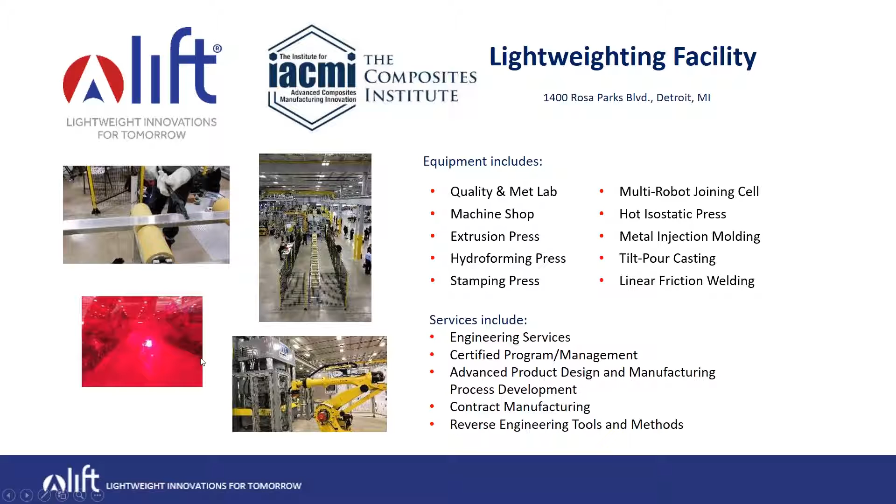We have a wide network of industry and academic partners, so we can team up with all of them to serve your lightweighting innovation needs. You can reach out to us at lift.technology, or communications@lift.technology is the email address as well.

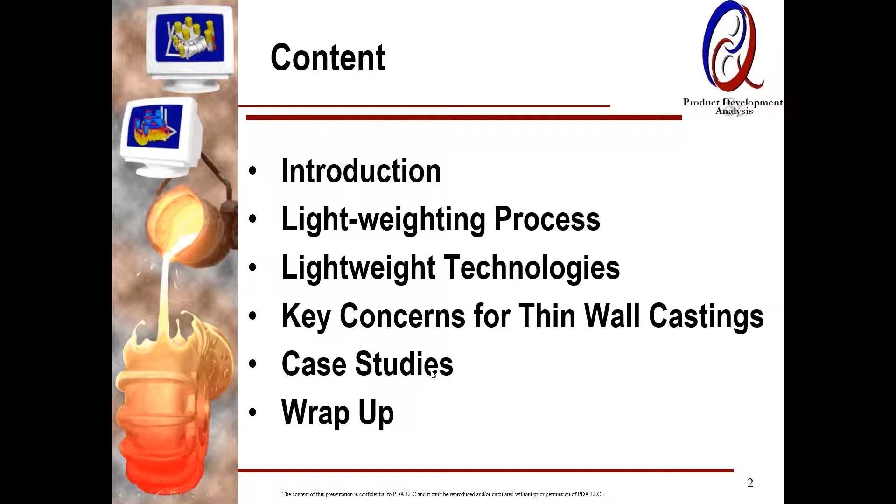So we are going to share some of the work we have been doing in partnership with LIFT, along with a few of our projects internally, and talk about the process. My content: a quick introduction, the lightweighting process, the technologies, a few concerns for making successfully thin wall castings that we learned and researched through the LIFT project that we'll be sharing. I'll wrap up with some case studies.

This is our 25th year. We started the company offering engineering services to metal caster OEMs, foundries, and tool makers. We have served over 150 OEMs, casters, and tool makers. We are a member of 3 institutes, including LIFT.

We worked on 3 projects on thin wall castings. We're also a gold member of America Makes, focused on 3D printing or additive manufacturing, and a member with projects working on the Digital Manufacturing and Design Innovation Institute out of Chicago. We also support the military DoD folks as a subject matter expert on casting and composite. You can see the membership.

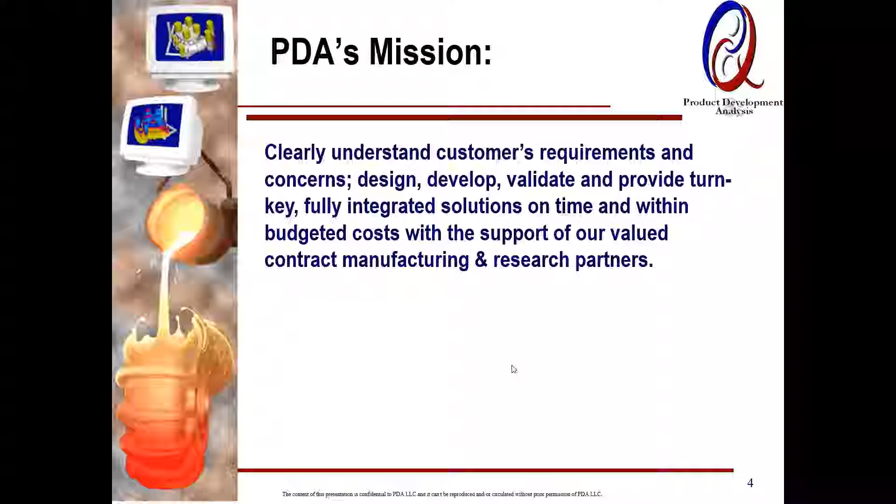Our mission is to understand customers' requirements and concerns, and come up with a solution which fits their needs on cost and time. Most of our projects are heavily solution and virtual simulation driven, including new technologies. 25 years ago we used to call it rapid prototyping; to me it's another version, additive manufacturing and such.

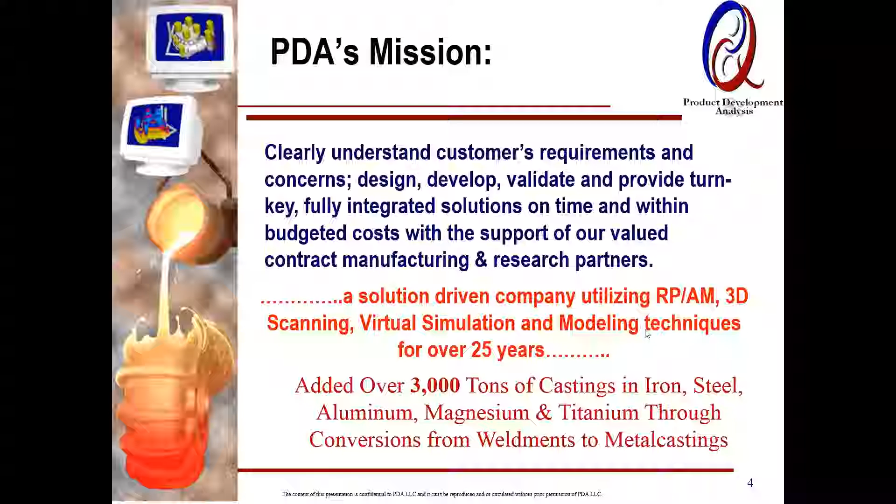We have really gone after our competition, which is forging, fabrications, and to some extent plastics. With our help, we have added over 3,000 tons of castings in various alloys by conversion. So quite a bit of experience on that.

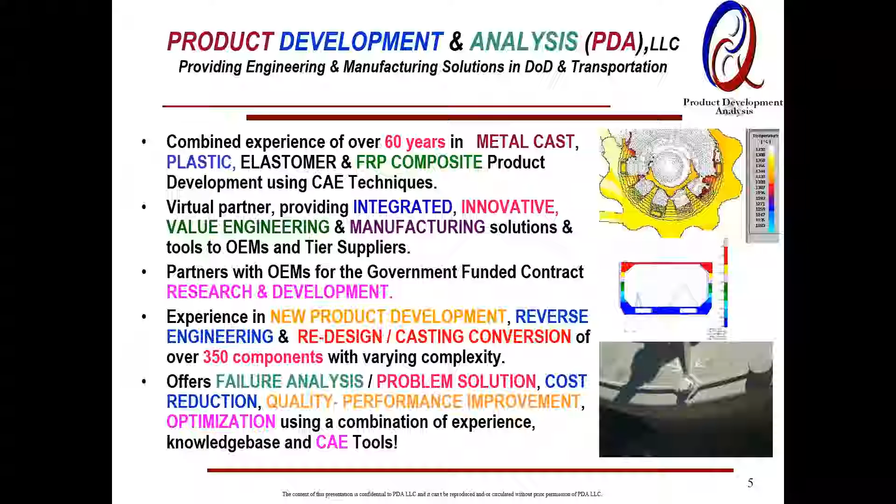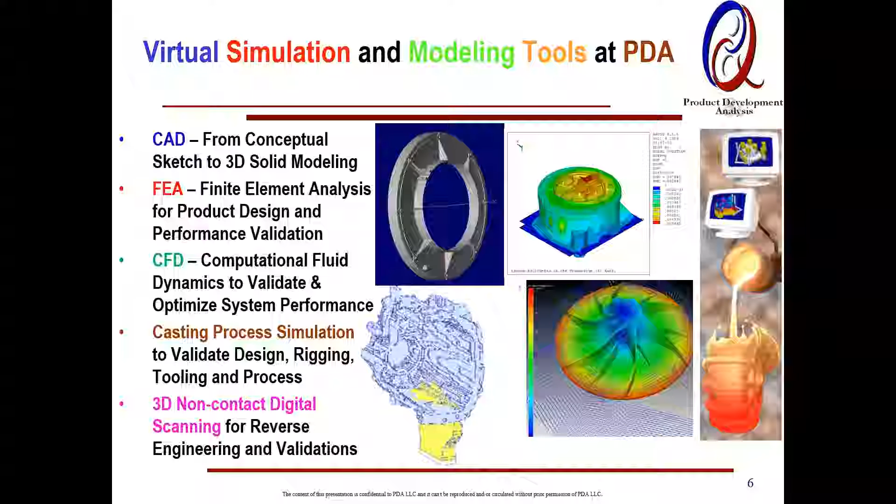In addition to the commercial work, we also get into R&D, and this is one example working with LIFT that I'll be sharing. These are some of the tools: standard CAE, CAD, FEA, CFD, process simulation, quite heavy on that for various processes. We have a very vast database, and 3D scanning.

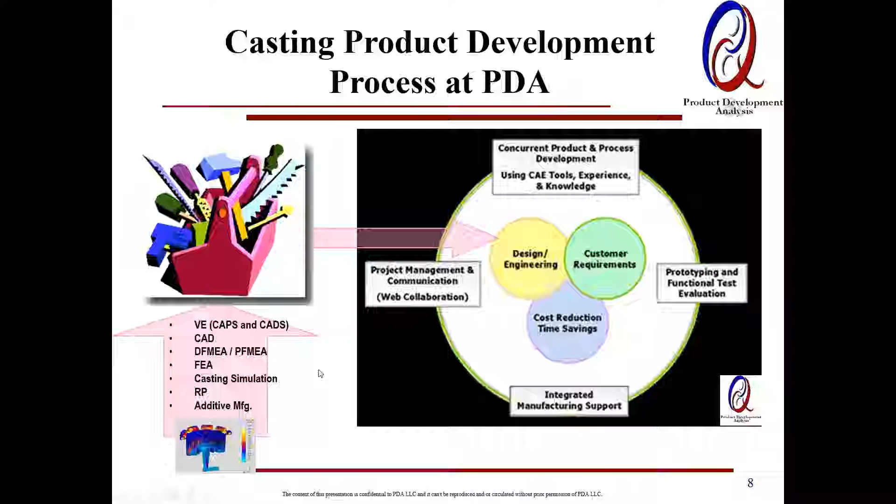These are some of the tools we use. We have internally developed a casting alloy process selector, capturing the best practices we use for selecting a process and an alloy. CADS is another tool, where we worked with the American Foundry Society to generate a placeholder for a material database suited to various casting processes and alloys. We also use additive manufacturing quite effectively as a tool to lightweighting, coming up with lightweighting solutions that I'll be talking about.

So the key element for a successful lightweighting project: design optimization, value engineering, and I'd say this is very critical - evaluate the process capabilities with regards to dimensional and surface finish aspects, especially when going up to thin wall casting manufacturing in production successfully.

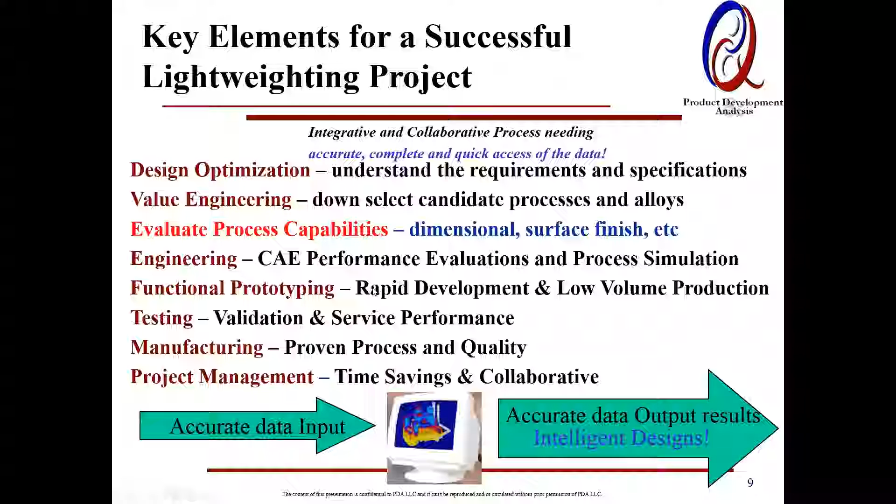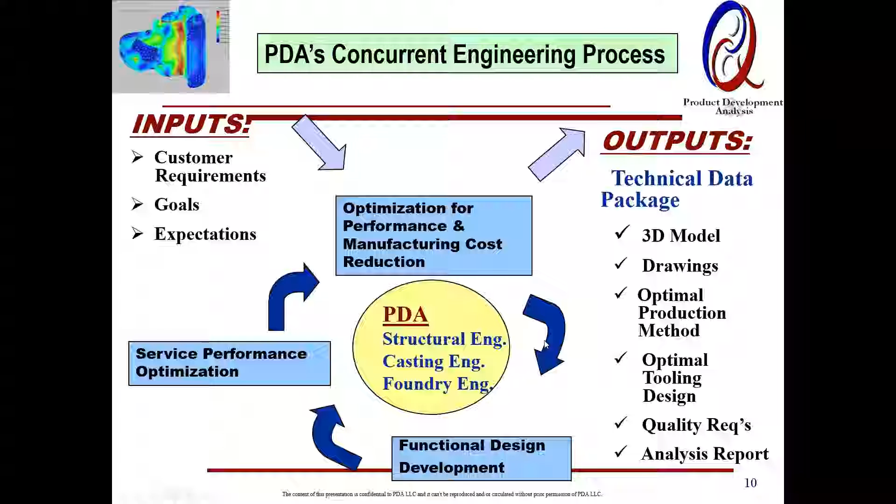Then we get into detail engineering, all the performance validations. We do invariably go with functional prototyping, validate and refine our model design, and then get into production. So it's all driven digitally from concept to finished products, and we heavily focus on optimization for product performance, and also manufacturing cost reduction.

So inputs, requirements, outputs could be the data package or a physical component, and we effectively use failure mode effect analysis at the design as well as at the process levels.

So what are the opportunities we have for lightweighting? Obviously, if you have the time and resources, the best benefit you get is right when you are developing a new product, as opposed to developing traditionally and then converting, especially with technologies such as additive manufacturing. It offers tremendous design freedom, and you can do a lot of part consolidation, and obviously the knowledge and experience is key, even though there are quite a few new tools out in the marketplace for generating designs. Those are quite effective, but you have to top it off with the knowledge and experience about the process and the alloy.

So the new product is quite intuitive, but also redesign and reverse engineering, especially for legacy parts, for optimization - that's a greater opportunity in my mind, where you have a legacy part and you can redesign to get the weight out and improve the performance and come up with a solution which overall leads to the lightweighting of a device or equipment or a platform.

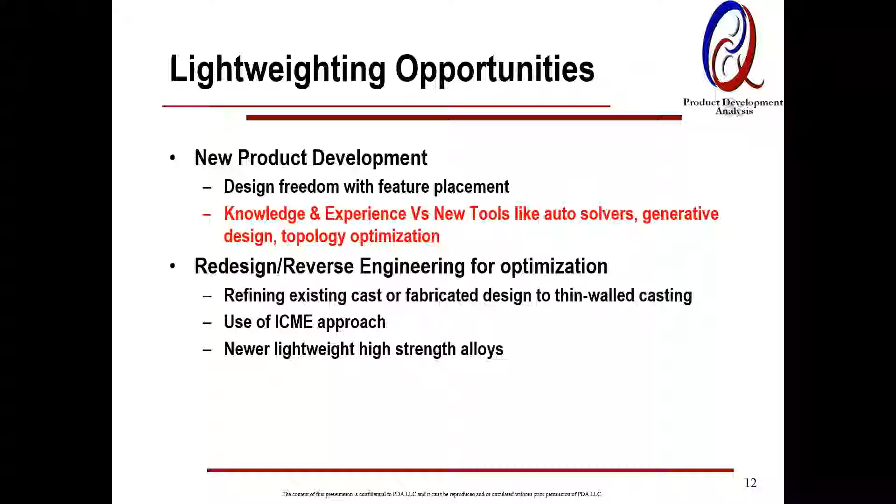And we extensively use the ICME approach, and there are quite a few new alloys being developed. I'll share the one we ended up working on as part of the LIFT project, and that's another way you can optimize by redesigning the current product.

So ICME is basically integrated computational materials engineering. It's basically a way to capture the material information along with the process and simulate the process conditions, for example cooling rate and chemistry, and come up with predictive microstructure and properties, and ultimately plug those in to validate your final product performance from the structural point of view.

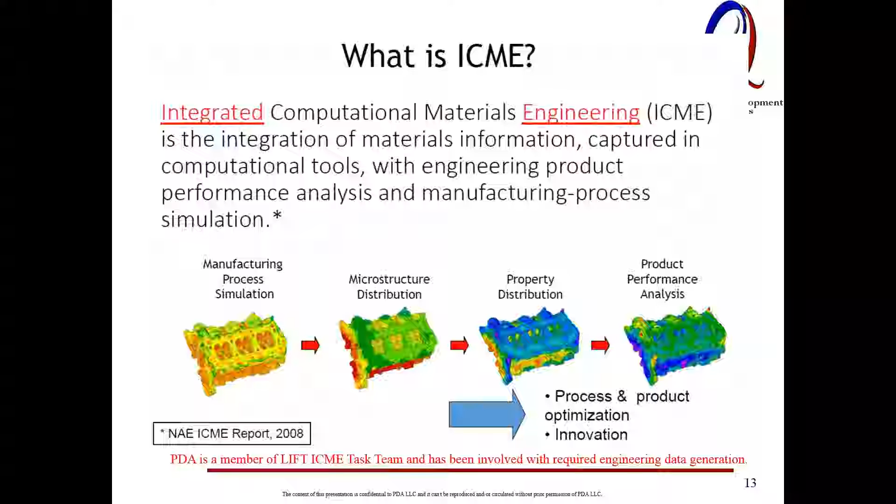And LIFT has a very powerful ICME task, which we belong to and contribute towards that mission. This is a very effective tool that you almost have to use in order to get any form of lightweighting or design optimization, by using the local properties that you would expect, as opposed to using handbook data.

So jumping a little bit here, for us on the metal casting side, lightweighting comes by reorganizing the features and, more importantly, thinning the walls. And how do we do that successfully in production? These are some of the key factors that influence successfully implementing or making thin wall castings.

The fluidity of the alloy drives how thin you can make it, which is driven by the thermophysical properties, namely viscosity and surface tension, and the process conditions - the pour temperature, which typically, with most alloys, the higher the temperature above the liquidus, the better fluidity you tend to get. But there are penalties with that, which I'll also deep dive into.

And then solidification and microstructure evolution - with a thinner wall you have higher cooling rate. For directionally solidified alloys, you have shorter feeding distances, so that poses a challenge with regards to feeding the casting to the soundness you're looking for.

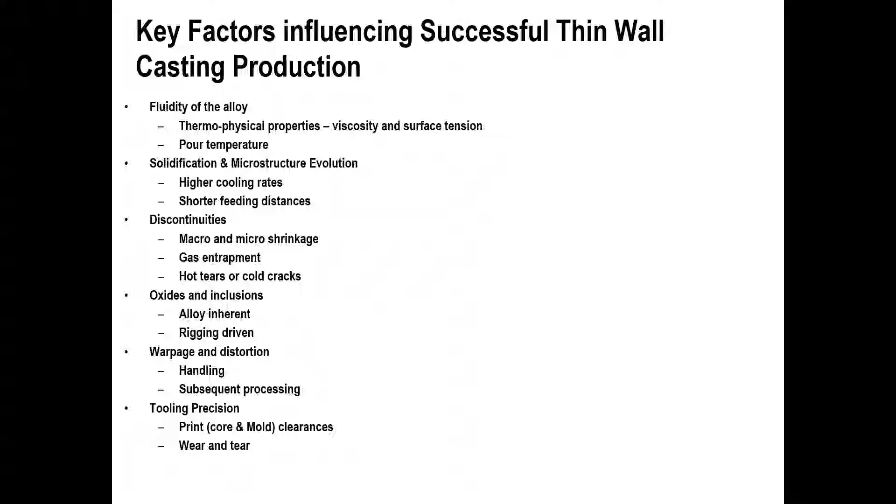Especially your print clearances between the core print and the pattern and the core. And then normal wear and tear adds to changing those clearances and then ultimately affects your final wall thicknesses.

So how do we mitigate or come up with solutions for these obstacles and successfully make thin wall castings? Obviously new alloys which have better fluidity, rigorous simulation using ICME tools, and novel risering, gating, filtration, and venting schemes that you would need with thin wall.

I would say automation in handling. This is our experience on one of the LIFT melt projects where we did make thin wall castings, but we only got 30-40% yield at the end of the line. A lot got broken in the tumbling and shakeout operation. So it is a challenge, and you just have to think through and come up with a way of handling thin wall components.

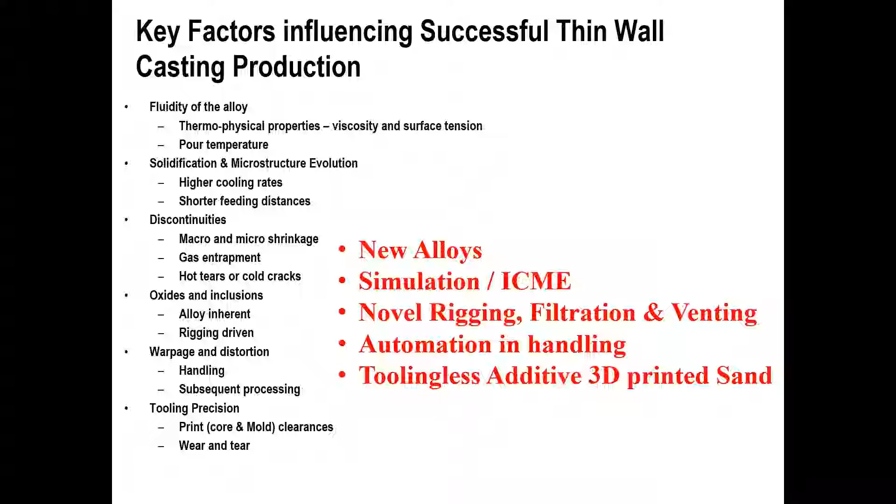And then to completely mitigate and eliminate the issues related to the tooling is the use of toolingless additive 3D printed sand, which really opens up the whole freedom to the design engineers and production engineers to really go after thin wall repeatedly.

In terms of the technologies I will cover: new alloys or modified alloys with relevant properties in order to achieve the target goal of lightweighting. I'll also expand on additive 3D printed sand, comparing it with traditional sand casting, or a combination of hybrid traditional sand mold with 3D additive core package. Plenty of opportunities there.

In some alloys, thinner walls have better mechanical properties than thicker ones, relatively. This is counterintuitive to design engineers. The mechanical engineers tend to get a little nervous and say, hey, I want to add thickness based on what FEA told us, just to be sure. But in some cases, by adding thickness, you are deteriorating the properties.

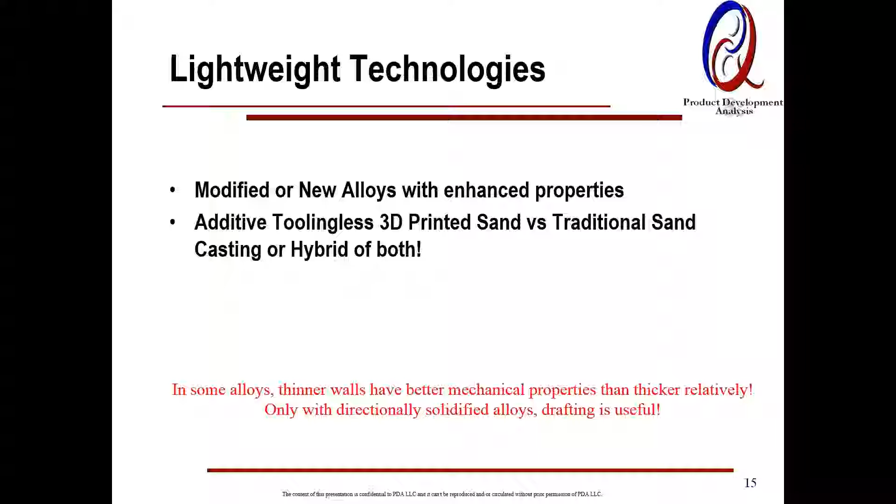Only the directionally solidified alloys, for example steel, where drafting is useful to get a nice feeding channel established. But otherwise, for most of the iron and short freezing range alloys, the tapering really is not required unless you are going with conventional tooling that needs the taper to draw the tooling out of the sand.

This is our LIFT melt R2-5, that we developed to make thin wall ductile iron castings — a high fluidity alloy that helped us successfully fill thin wall castings. Here is an example of experimental work: a simple spiral fluidity spiral, which is quite popular.

Years of work has been done in this area just to measure fluidity and compare between alloy A and alloy B type. What we did is keep all the process parameters constant, in both the simulation and the experimental conditions, such as pour temperature, time, the type of mold material, and the applied vent.

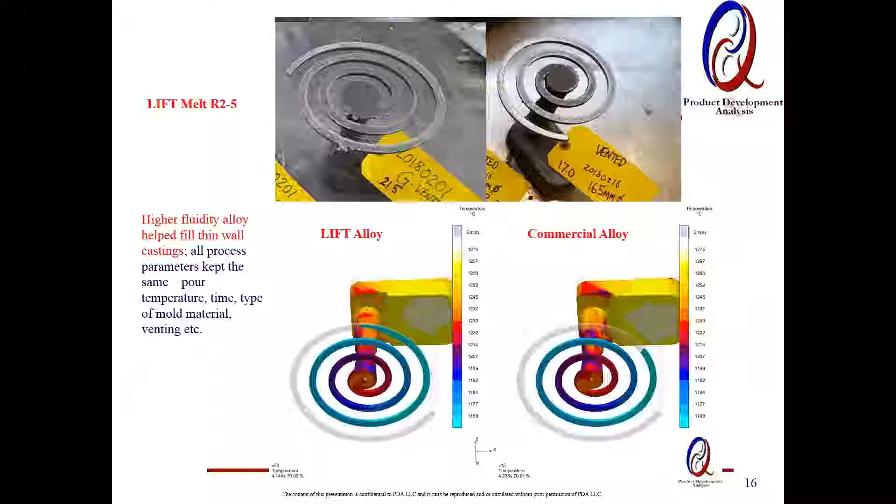For this particular alloy, we got a feel for higher fluidity distance. One way we measure this is the overall length, or the maximum dimensions. Here we got about 21.5 inches versus 17 inches for the commercial alloy. We were able to simulate and get a feel for this before we actually made the prototype and plate castings.

So that was on the spiral. Then we made finger castings — a typical 65-45-12 commercial alloy — under these process conditions. You can see the filling pattern is quite uniform. We had thicknesses from 2 millimeter, 2.5, 3, 3.5, 4, and 6 millimeter, all poured under the same tree.

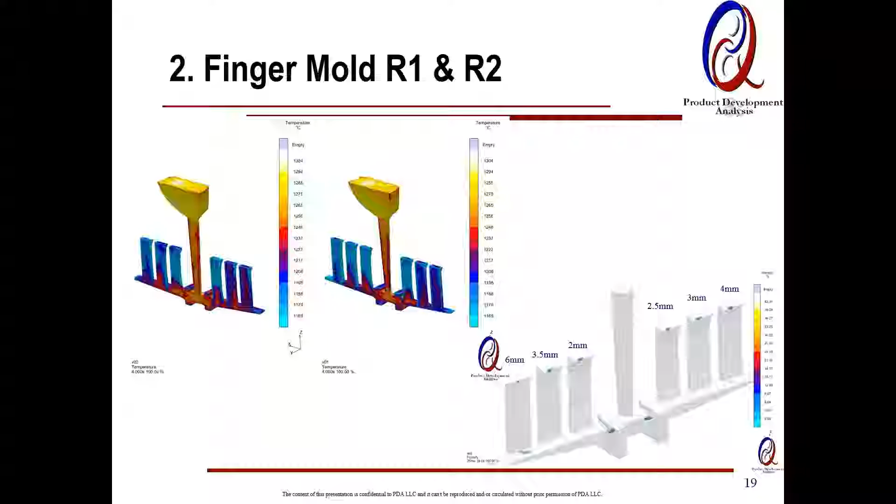This is quite common — in any industrial casting you may have a combination of all these thicknesses — and we wanted to make sure that in the high stress area, it predicts the properties and soundness that the mechanical engineer wanted from FEA and fatigue calculation.

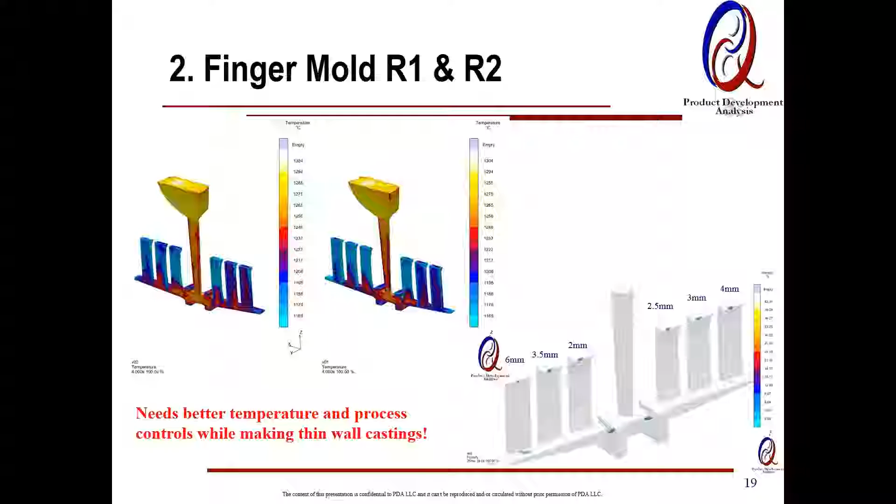One thing we learned from a lot of this experimental work, with support from Michigan Tech University who were part of the team, is that in order to make thin wall castings, you really need better temperature and process control, because it's quite sensitive.

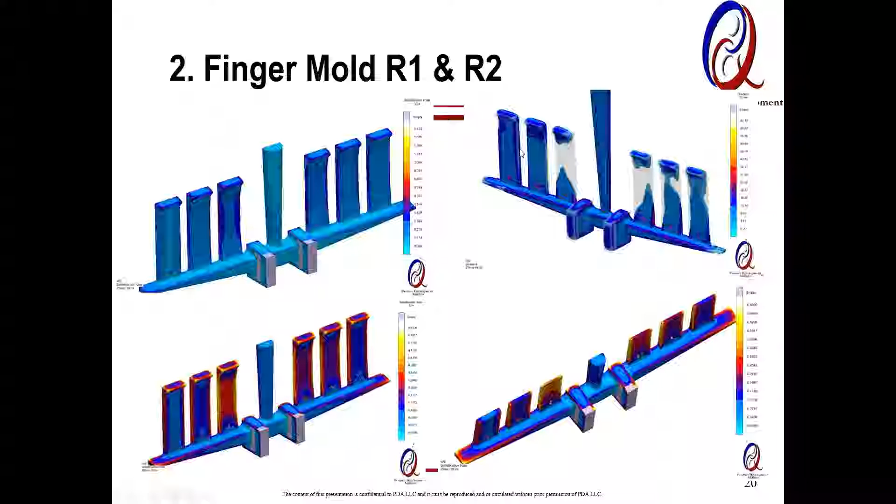A temperature variation of plus or minus 20 degrees, which is what you see in the commercial environment, may give you a totally different result, and you may not succeed. So you need to tighten up your process controls.

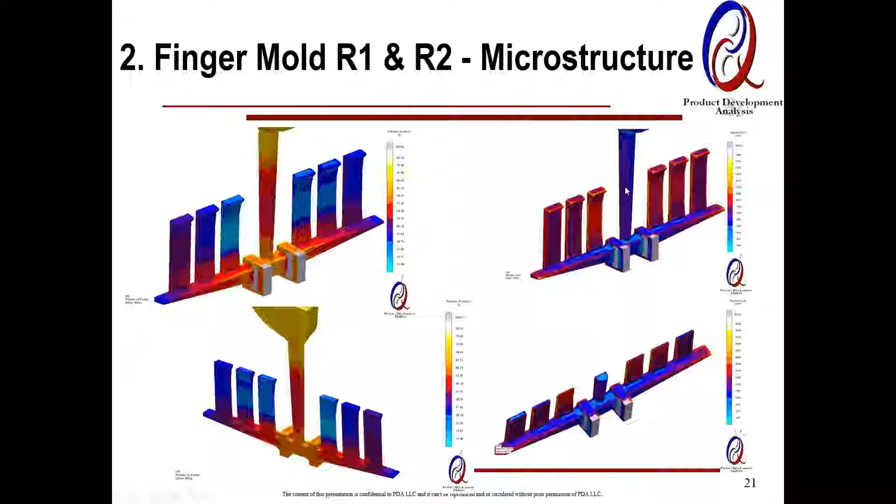With different section thicknesses, we obviously saw different solidification rates, different cooling rates, different gradients, as you would expect — this being the thinnest and this the thickest. When we went further into predicting the microstructure, we looked at the fraction of ferrite, which is strictly driven, for the same chemistry, by cooling rate.

Higher the cooling rate, the less ferrite and more pearlite you will have, and that impacts your properties, most importantly the elongation. As you can see, it's the same casting, same chemistry, but different wall thicknesses.

In the thinnest wall, we found around 2% elongation where we really wanted 12%. That led us to modify the alloy to get 12% elongation in the 2 millimeter wall thickness.

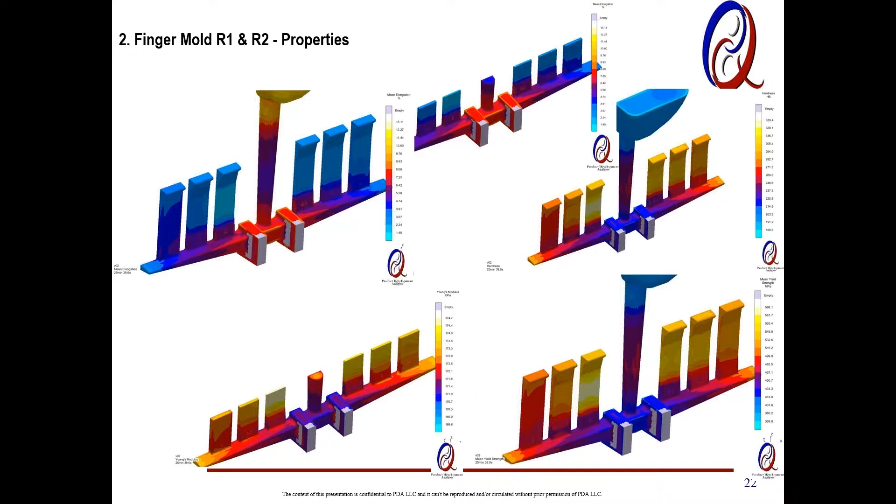This kind of work helped us set the stage and direction for the research needed to achieve that goal. This again lays out the importance of the ICME tool as part of new product development for thin wall castings.

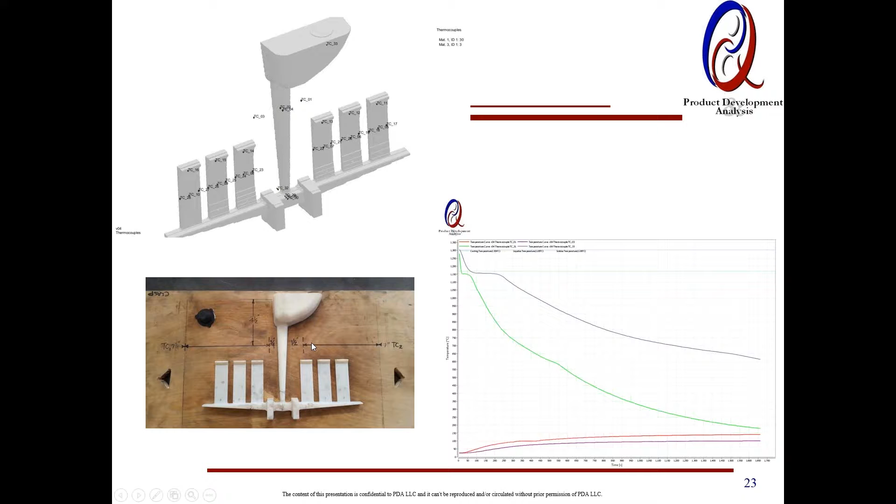Modeling and simulation is based on data, and you need to calibrate it. When we poured these castings at a small foundry with part of our team, we instrumented thermocouples at known locations and captured temperature and time, which we recorded and got a good match. We thought we were pouring at 1300.

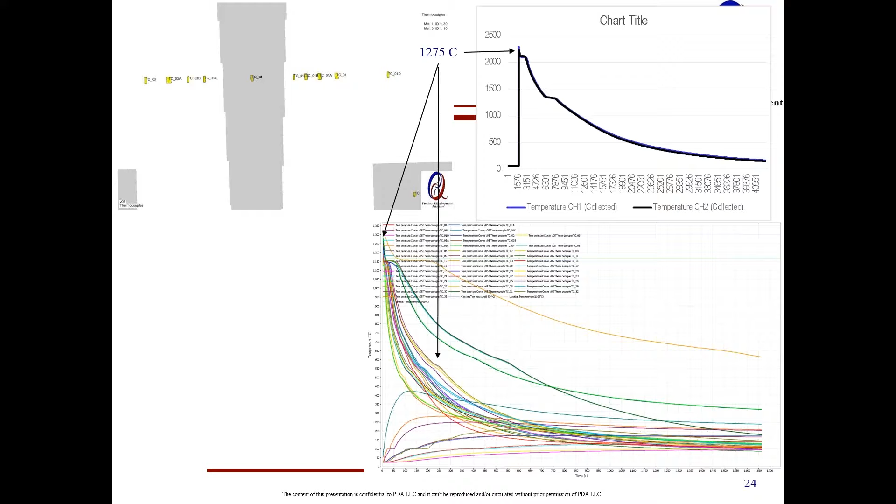By the time we got the metal into the sprue, we were around 1275, which matched fairly well with our simulated conditions. We put thermocouples in the metal as well as in the mold. So that basically wraps up making thin wall castings - the things to really look after, and how you may have to work on expanding your alloy scheme, make some modifications to get what you want. In our case, fluidity and better properties.

Additive manufacturing, I'm sure most of you are quite familiar with. Our version of additive is strictly printing a mold without tooling, or printing a wax pattern without a wax die for making investment casting, or printing a mold out of silica sand or zircon or chromite, and you just pour the metal - which is quite different from additive manufacturing as understood. Metal additive is where you build layer by layer using metal powder to build the actual physical part.

What we are doing here is actually making a cavity and pouring the same commercial alloy with the same ASTM spec, with the same known behavior, and the only magic is you don't use tooling. So that opens up a whole opportunity for design engineers - removing the draft or having a backdraft, putting the fillets and radii where you want, which you could not do because you were constrained by the parting and tooling restrictions. You can consolidate some of the welded, bolted features as part of your casting and come up with a one-piece casting design. And it's our experience that we get much tighter dimensional tolerances.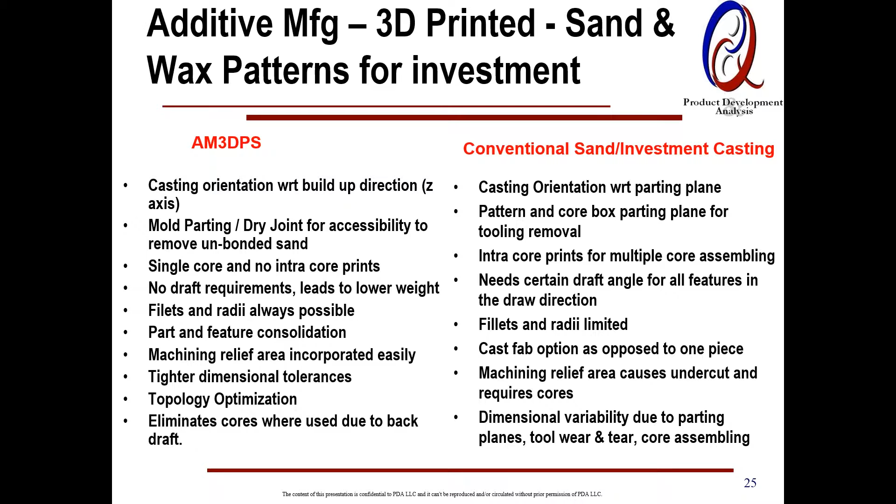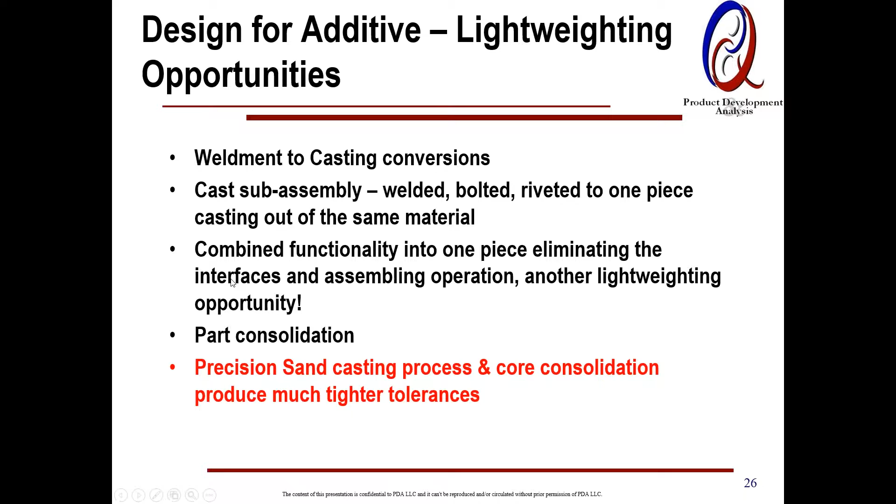So that is an area where there's an opportunity for lightweighting without even doing anything, just by switching the process from conventional sand casting to 3D printed. You can easily gain weight reductions, and then of course topology optimization - you can punch holes wherever you need in the low stress areas. You don't have to worry about adding a core or anything, it's self-cored. This gives tremendous freedom and helps us go after more fabrication-to-casting conversions, making cast sub-assemblies by eliminating welded, bolted, riveted joints, and even combining functionality into one piece by looking at a sub-assembly and combining multiple operations into one piece of casting that fulfills multiple functions.

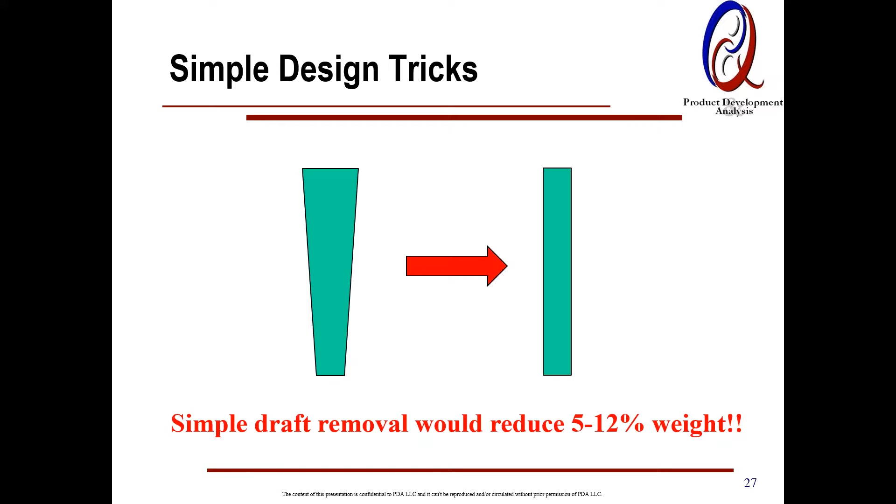We try to label this 3D printing process precision sand casting, so there is a distinction compared to conventional sand casting. It is a sand casting, but it has much higher precision and tighter dimensional tolerances. So that's another way we can do some lightening. The simple trick is, if you just remove the draft, in our experience - we've done quite a few projects - you can see anywhere from 5 to 12% weight reduction. This is low-hanging fruit; we don't really have to do much engineering around it.

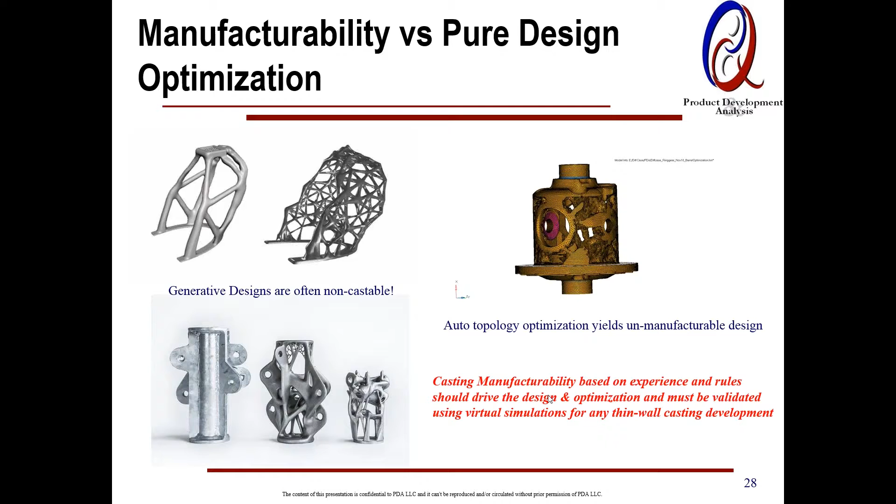So topology optimization - it's the computer which does all the magic. It does help to see where you can take the weight out, but you need a traditional approach based on manufacturability, like how the metal is going to flow into these thin areas and what kind of gating system would even guarantee that you'll be able to fill this part consistently. So I would say use that as a tool to get some direction, but ultimately go with the traditional approach of design optimization, validated with virtual simulation, for any thin wall casting development.

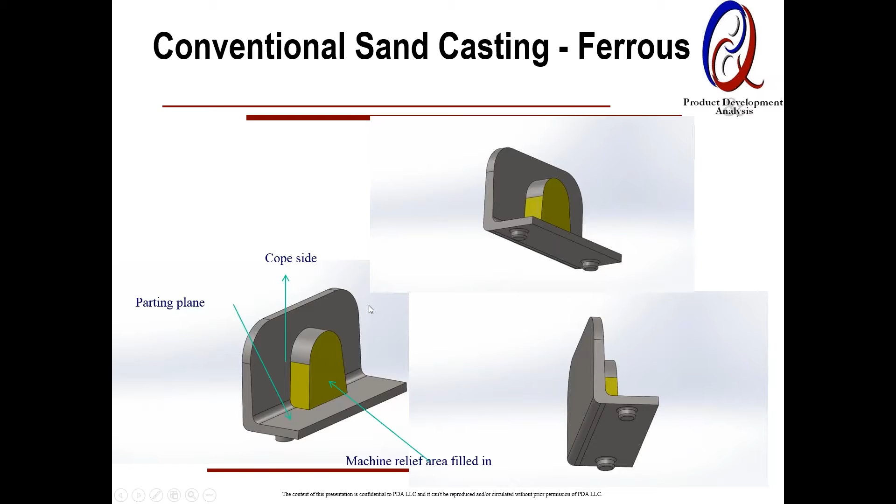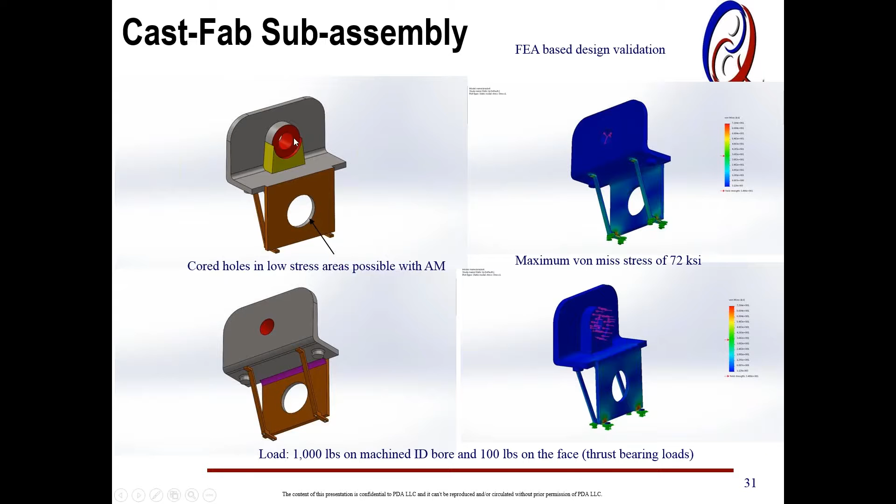So I have a couple of examples. This is actually a portion of a much larger casting that we helped an agricultural OEM with. This is the conventional sand casting. One of the issues they were having is, when they were milling this pocket, they really wanted a machine relief area, and in order to do that with conventional casting you would require a core the way it's parted - and we saw that as an opportunity. So here is the casting, here is the welded plate with the braces, and here is the FEA-based predictive stresses.

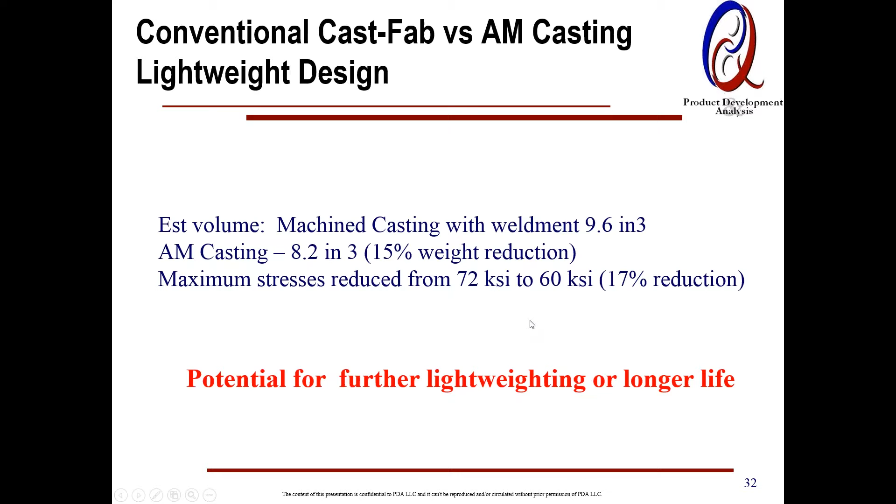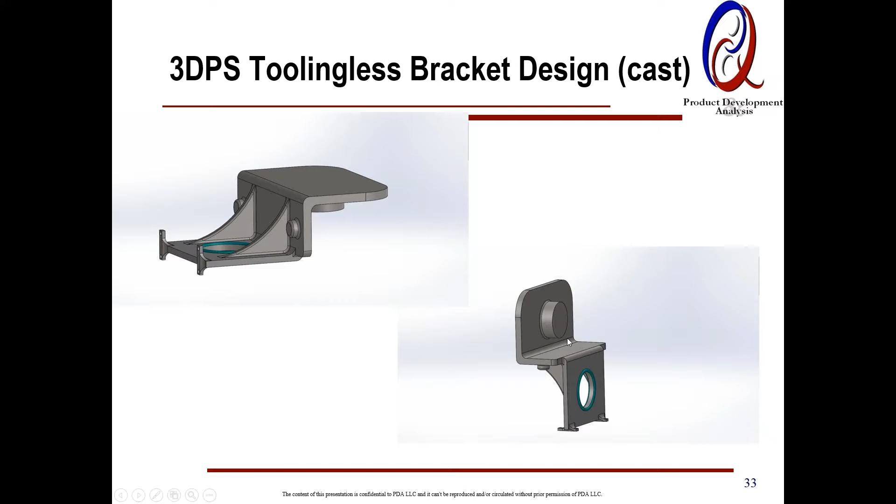Here is the loading - there's a bearing which goes in, and this is how it is made currently. What we did is we went with the additive route using 3D printed sand and gained about 15% weight reduction, and reduced the maximum stresses from 72 KSI to 60 KSI. So there's potential for further lightweighting, or since this is highly fatigued, with lower stresses you'll see a longer life of these components - it's a high cycle fatigue. So this is the bracket design we came up with.

Combined, stiffeners on both sides. They wanted a relief area, and we were able to do that. Also, this is from my experience making locomotive truck frames, where if you just have a regular hole, a cored hole, you lose the material and the stiffness. You can regain some of that by putting a bead on both sides of the cored hole.

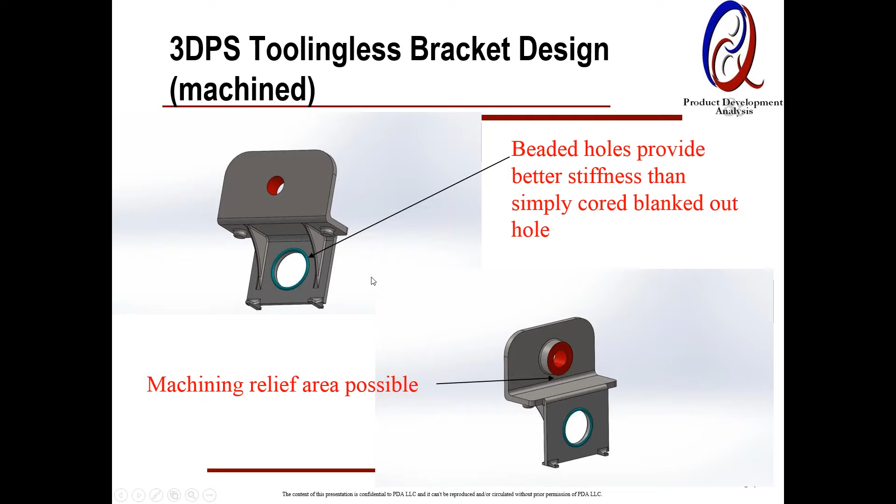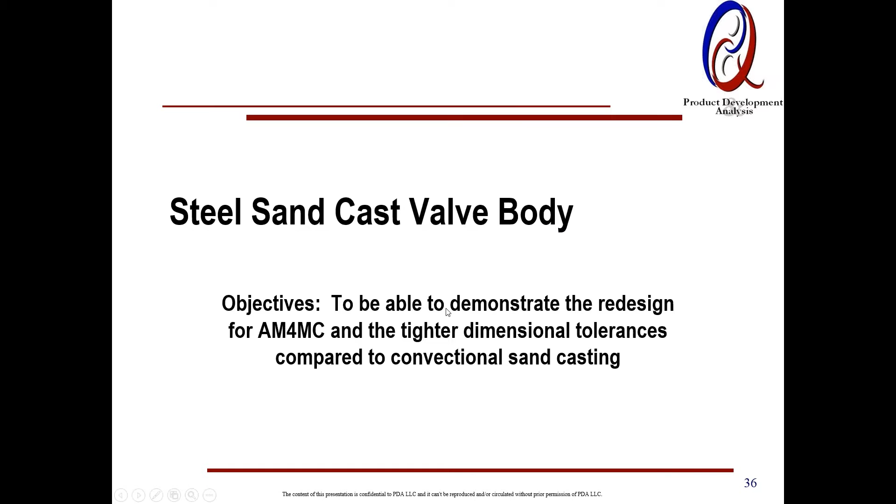Traditional castings, this will create a back draft. Either you need a loose piece or additional cores, and that would impact consistency. Additive, the 3D printed sand, really offers tremendous flexibility and a solution which improves the design. We were able to incorporate a machining relief area and drop the stresses from 72 KSI to 60 KSI.

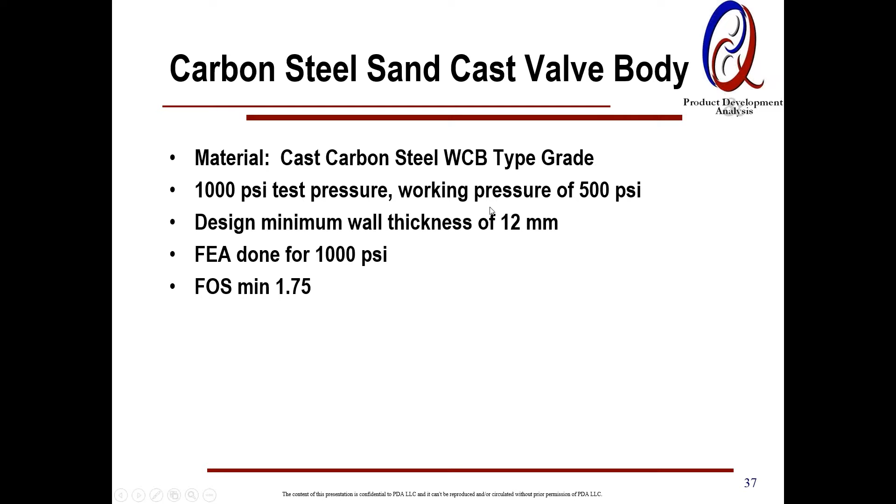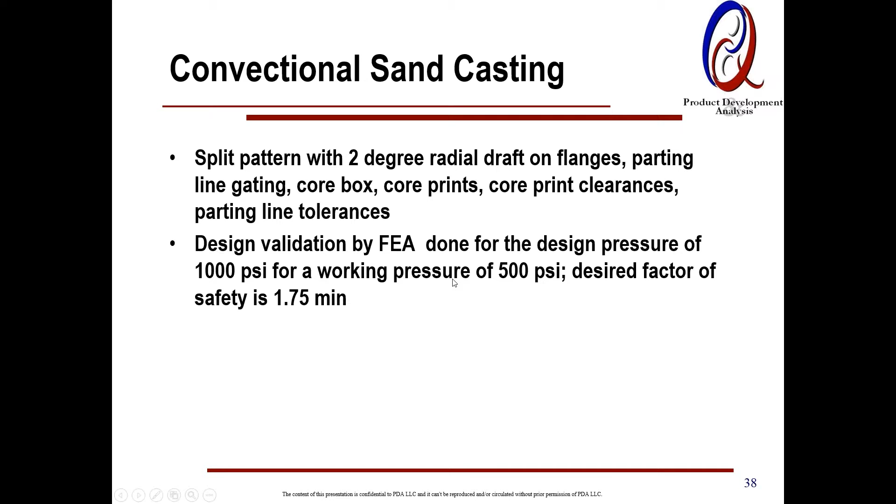Another example, I want to demonstrate what you can gain with tighter dimensional tolerances. That's another quick low-hanging fruit. So we looked at a carbon steel cast valve body, WCB, 1000 PSI test, working pressure 500, minimum wall thickness 12 millimeter, which was derived based on the ASME code and FEA. Conventionally, it's a split pattern with 2-degree radial draft on flanges, parting line gating, core box, core prints.

Core print clearance is 1/16 of an inch per side, and we converted that. We looked at that, and the point here is, if this is one of the standards being used in the industry for dimensional tolerances, ISO 8062, the conventional sand castings are typically in the range 11 to 14. This table, by the way, is a function of the processes and the dimensions, the basic dimensions.

So if you look here, conventional sand castings, let me get rid of this. It's anywhere from here to here. The investment casting would give you tolerances spread 4 to 6. Based on our limited experience, what we see is the 3D printed sand kind of gives us pretty close to the investment casting. So say, for example, instead of picking CT11, if you pick CT5, look at the variability on a key dimension. It's plus or minus 3 versus plus or minus 0.38.

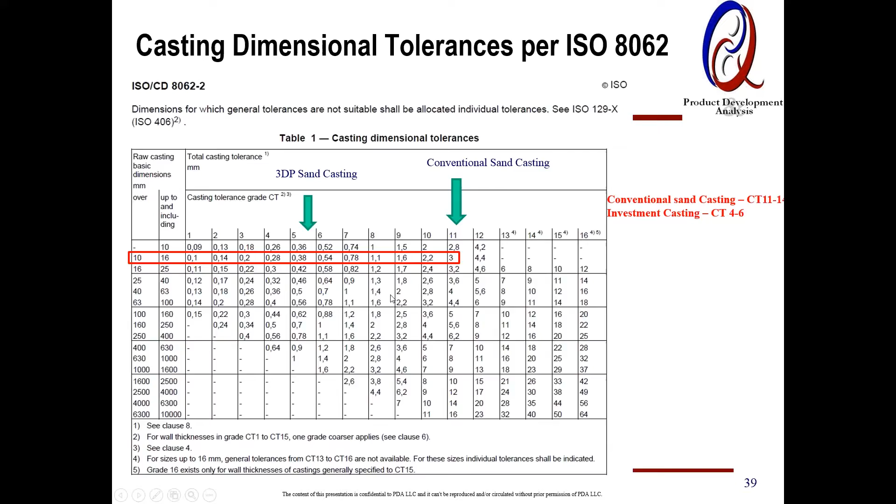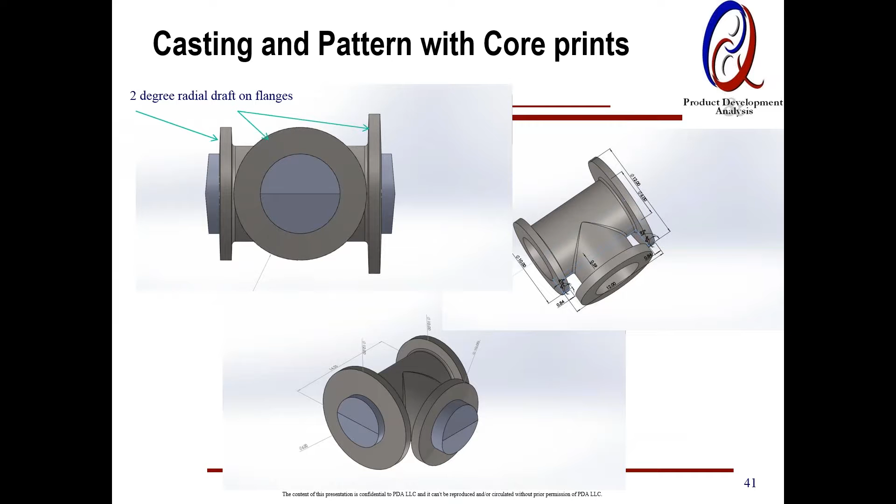So simple stuff means your current casting wall, and this is the current design. I don't know if you can see it clearly, but the wall thicknesses are given here, and with the tolerancing, you have to have whatever is the design wall, 12 millimeter plus at least 3, so 15 millimeter, whereas you can go 12.38 or 12.4 and still be okay with the minimum wall thickness requirement. Just by doing that simple trick, we validated to make sure the stresses don't go out of range. This is the conventional, this is the volume.

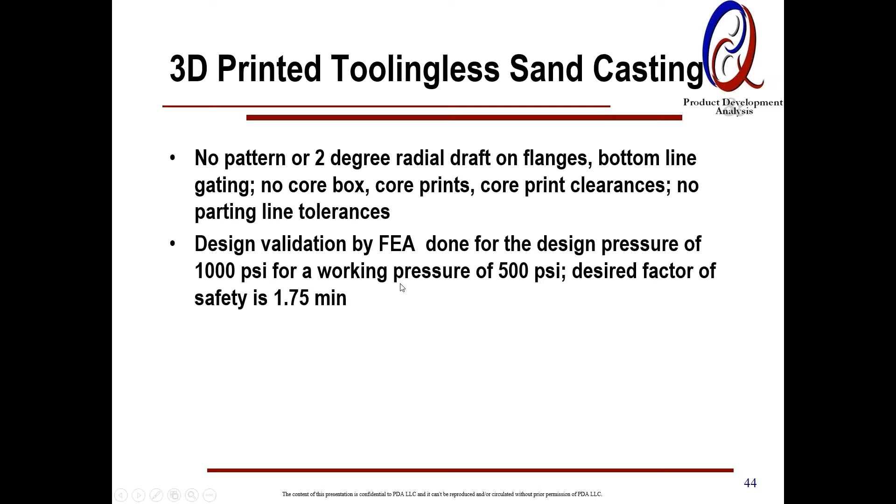I have a summary which we will go through. Here is the core you need, with the core print and the clearance. So with the 3D printed route, all the drafts are gone on the flanges. That helped us save some weight, tighten up the tolerances, and we were able to, keeping the same stress level, reduce it. This is how the design looks with no draft.

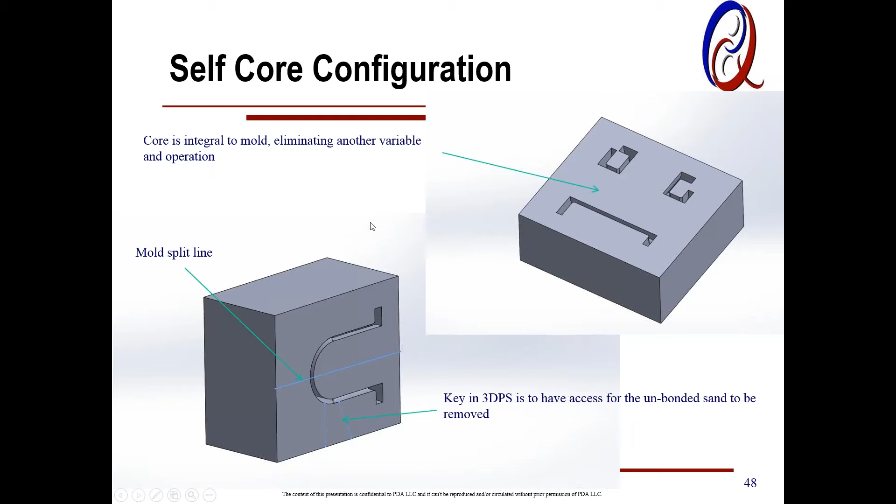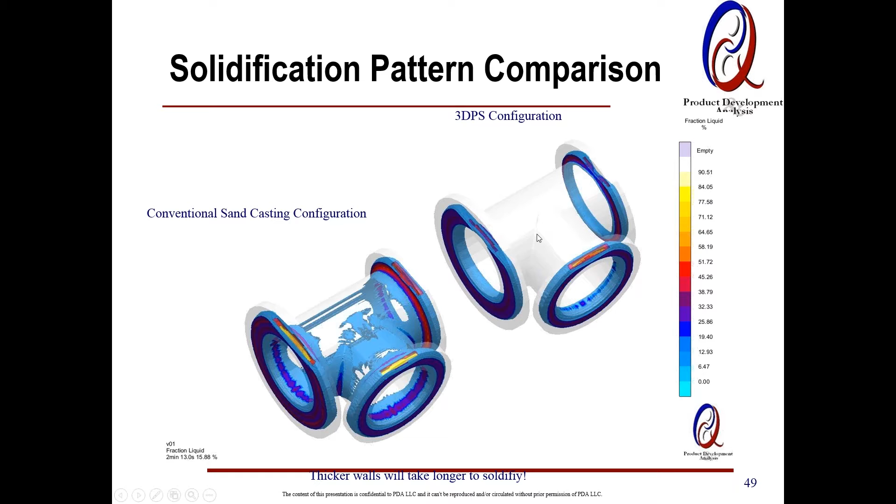We also thought there is a possibility of making a self core, so you really don't have to have a core even with the 3D printed part. There are ways you can get the loose sand out by creating pockets of unbonded sand. We gained 15% weight reduction, 15% weight reduction here. Another thing we saw happening is it improved the quality with shrinkage predictions, and because of the cooling rates...

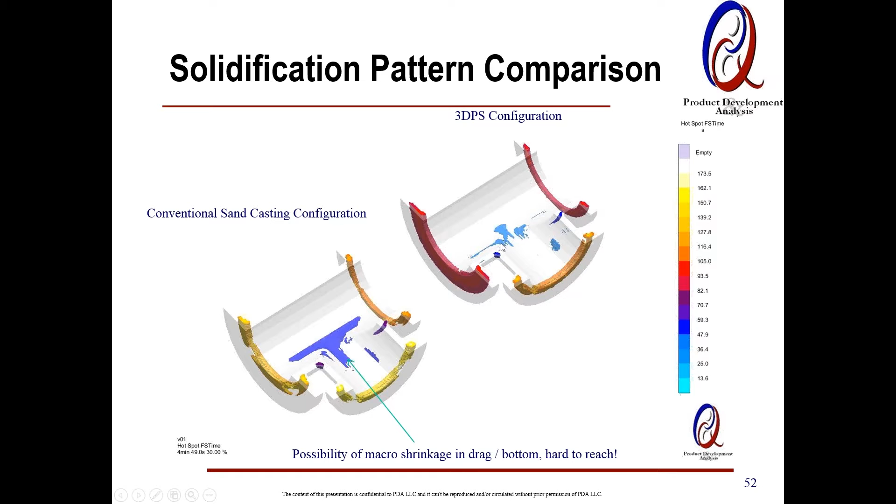This is with the conventional design. This is in the drag, which is very difficult to reach. You almost have to use a cast chill. Here, you have the shrinkage within the acceptable level, much reduced, and overall it's a win-win situation. We reduce the machining stock. So this is a good example to demonstrate simple things like tightening up the tolerances and removing the draft, and this is without even making any changes to the alloy.

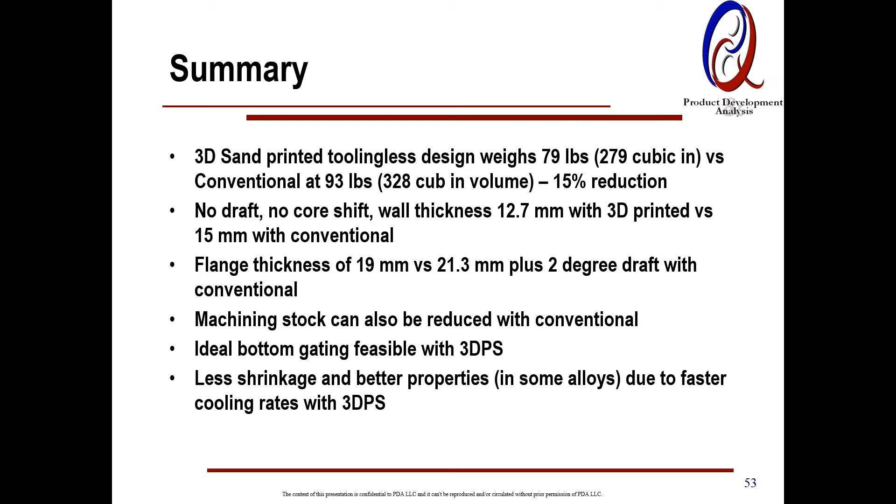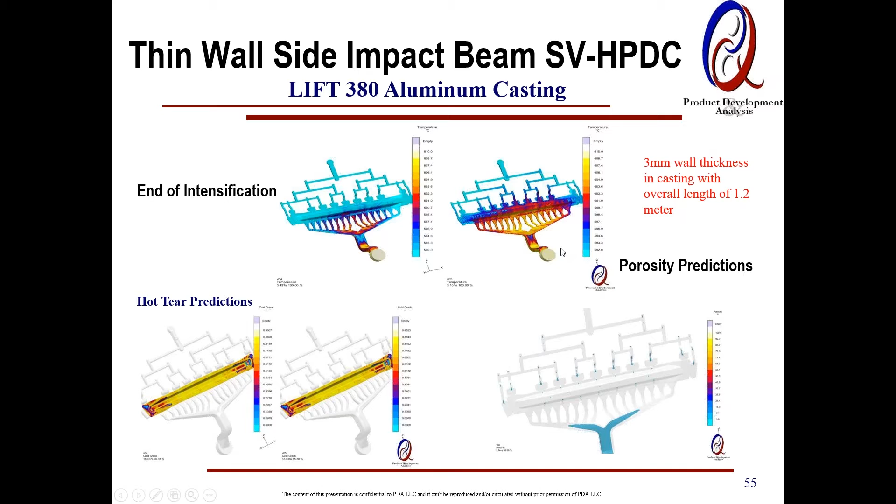15% reduction. This is actually a quick repeat just to demonstrate the point that ICME is so valuable. This is part of the LIFT 51B project on thin wall aluminum that was spearheaded and managed by Boeing, where we were able to predict the porosities and the hot tears. We ran a bunch of castings, 3 millimeter wall thickness, and we were able to find a very good correlation to what the X-ray results showed us.

These predictive tools are quite matured. You just have to calibrate and use the right database, and you would get good results. In fact, we have gone to a point where we are able to help clients in establishing acceptance criteria for things like shrinkage and cracks, based on fatigue, by estimating the critical flaw tolerance in casting process simulation.

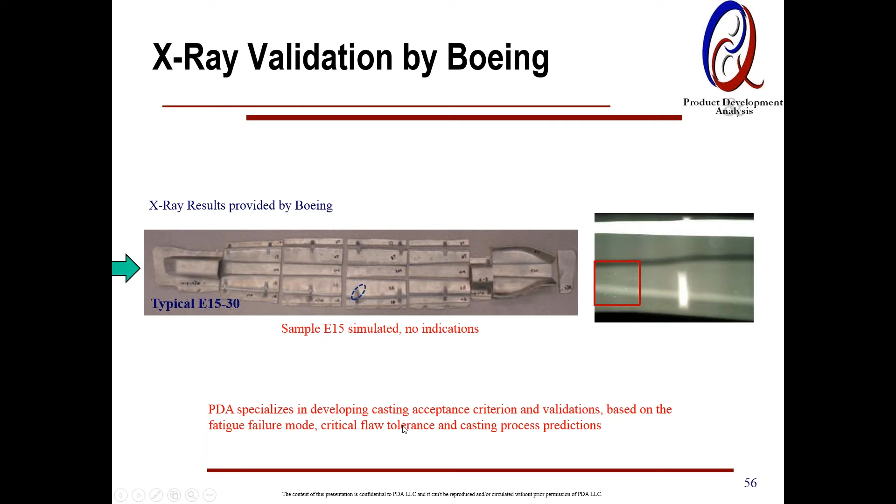The last thing I would leave with, this is courtesy of Greg Peterson, LIFT MMTC lead engineer, who has been working on it. It's a C2 Corvette lightweight hybrid frame, which has shown tremendous value in reducing the weight on the order of 30 to 40%.

We are looking at some of the nodes to make out of 3D printed castings. There are 4 nodal castings which we have thought together for redesigning to get thin wall 3D printed. We are actually looking for an OEM partner for off-highway military type applications, or even a hybrid autonomous light rail application, applying some of these composite and casting hybrid technologies.

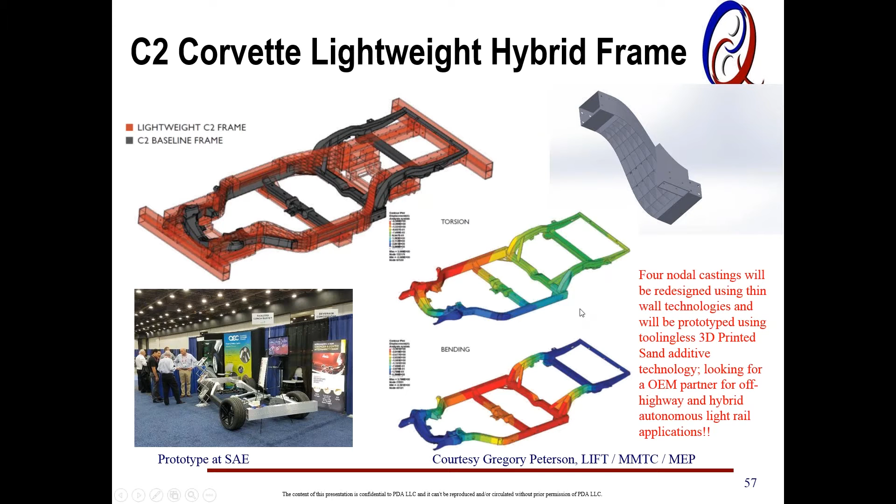So with that, quickly I will wrap up. As a company, we have worked with over 150 companies, including Fortune 100 companies. They may be 20 times more, or 100 times more, capable than our size little company, but we come across as their extension of advanced engineering resource, especially for dealing with casting, and that's our niche.

In wrap up, I would say thin wall casting technology is a viable solution for lightweighting using current state-of-the-art technologies, which are mainly ICME or extensive simulation modeling, using the right database, and opportunities of using new alloys or developing new alloys. And if you want to do it in the current production environment, you would need better process controls. You always get fruitful results when you use knowledge and experience to come up with manufacturable solutions. So with that, Joe, I think I'm wrapped up.

If you have seen any questions, I'll be happy to tackle them.